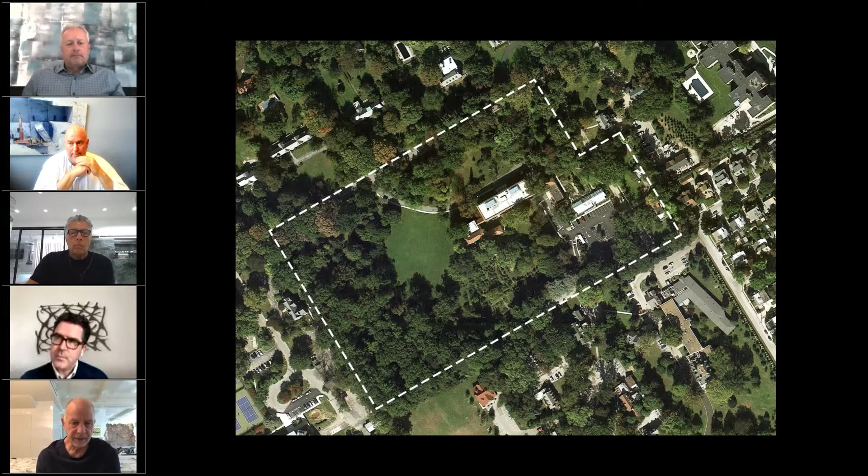He lived in Merion, Pennsylvania, in an arboretum with his wife, and he wanted every person to be able to see this art, particularly those who were not educated, not sophisticated. He welcomed people of all colors and all interests, but particularly those who were not pretentious, or quote, experts.

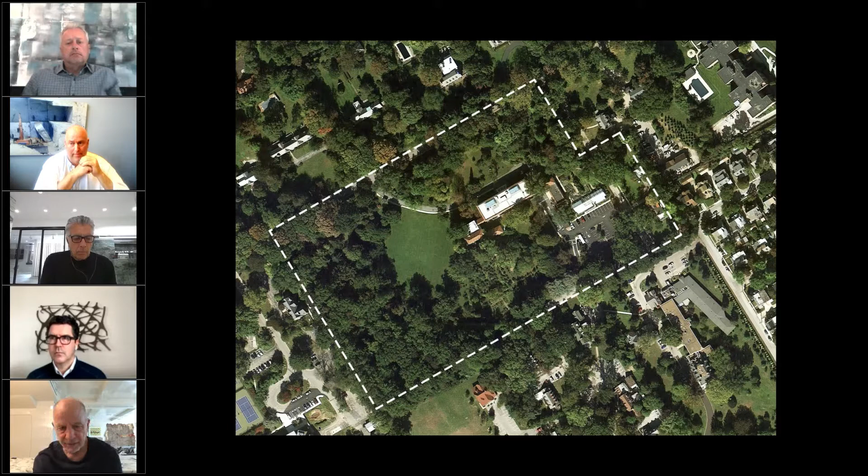Of course Dr. Barnes had a little pretension himself as the expert, but in time this wonderful location in Merion became a place where largely wealthy, white, often women and men would come, because it was embedded in a rather fancy suburb and was not an easy place to get to. Dr. Barnes, who died in 1951, was not there to help make sure all people came to his collection.

It suffered, and suffered sufficiently that they began to go broke. Dr. Barnes didn't allow his paintings to be photographed - he didn't want the paintings traveling. They had to remain there, and because it was in a very specific, small location, his will, which stated they not be moved, actually became a kind of trap for the Barnes Foundation.

Eventually, in dire financial straits with few people coming, and poor conservation practices, they appealed to the city of Philadelphia. In a difficult lawsuit - one that was won by the Barnes Foundation - they moved down to the Franklin Parkway, which we can see on the lower right, where most of the cultural institutions in Philadelphia are collected.

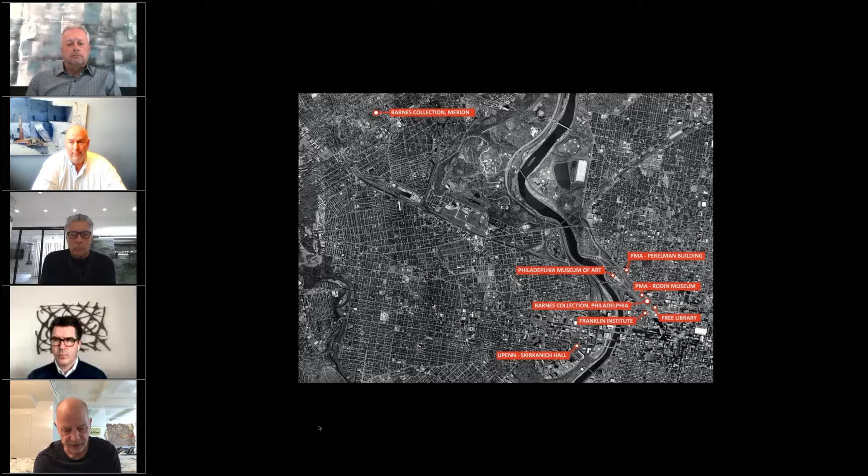The site he was given was the site of a children's house of detention, an interesting building architecturally, but it was so mute on the parkway that the only people living in the park at that area were the homeless. It was a very sad and actually a rather harsh existence for the kids who were there.

Eventually that was given over to the Barnes Foundation for one dollar, and a new facility was made more closely aligned to the land and landscape.

But nonetheless, there were plenty of protests. They believed that moving the Barnes to Philadelphia, breaking the will, was so far against the will and wishes of Dr. Barnes that they felt it was wrong. In a way it was, but in a way it wasn't, because Dr. Barnes was really very interested in having people of all color and all ethnic persuasions come to his museum, all abilities.

We came to the project, Billie and I and Phil, with an idea that the gallery was in a garden in Merion, Pennsylvania, which is where it was. Even though we were bringing it into the city, we wanted the garden to be in a gallery and the gallery to be in a garden, so we would have a both-and situation. We believe Dr. Barnes was both an elitist and a person who was really, really interested in populist culture.

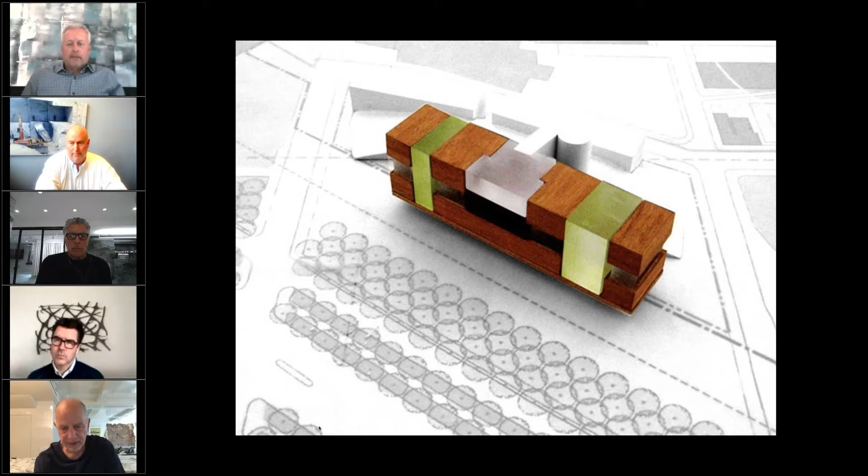This was an early model. By the time we had made this model, the image before was at the time of our interview, where we were simply describing ways by which we could think about the building.

The next image shows Paul Cret's plans. There were 22 rooms or 22 galleries, every one hung with a total of more than 2,000 paintings and artifacts, and they needed to remain intact. You can see that we analyzed the plans and found we could split the plan open and make the building accessible, which it was not, bringing light and air into the building and creating a better gallery experience.

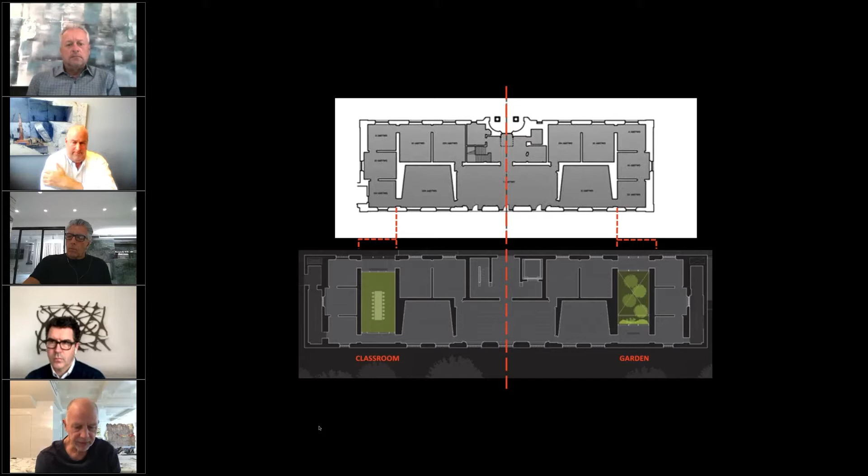We had a great client, and they were very comfortable with us showing them our sketches and struggles. Eventually we resolved, working with Laurie Olin, a plan that integrated not only the original galleries but all of the necessary functions for the new Barnes collection.

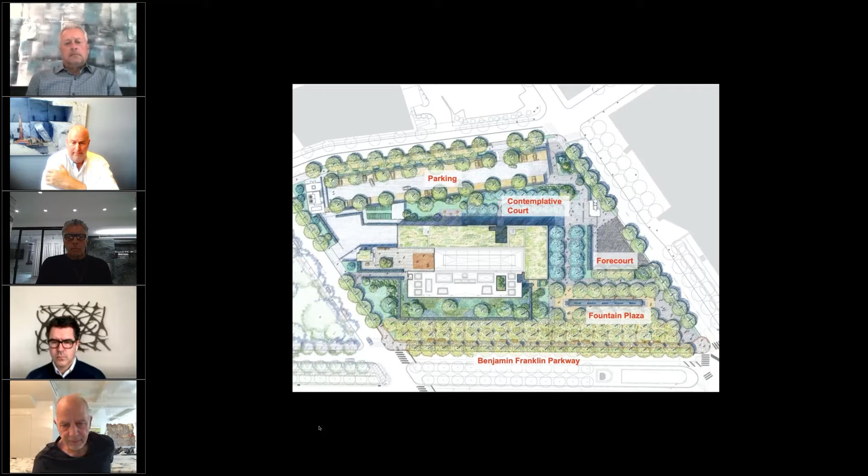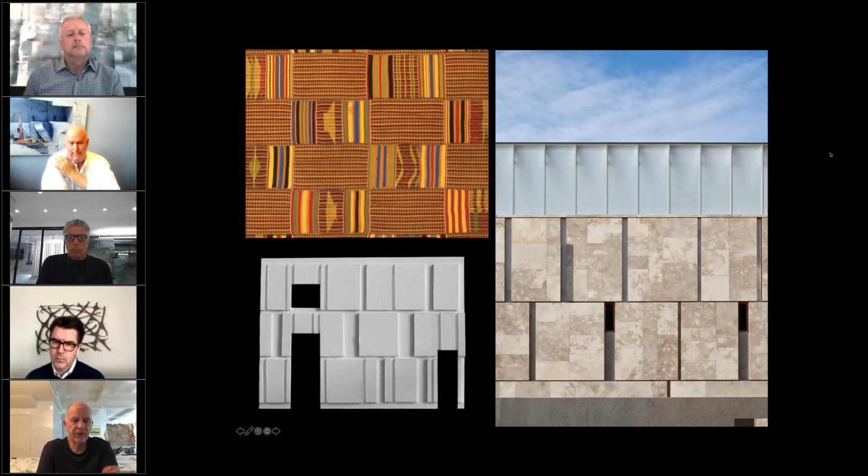I wanted to go back to the previous image and show first an image of kente cloth on the upper left, a model that we began to make so that we felt the building would be wrapped in a fabric, not a neoclassical wrapper, but in a fabric of cloth. So Phil, do you want to start talking and taking over the slides at this point? Yes, absolutely.

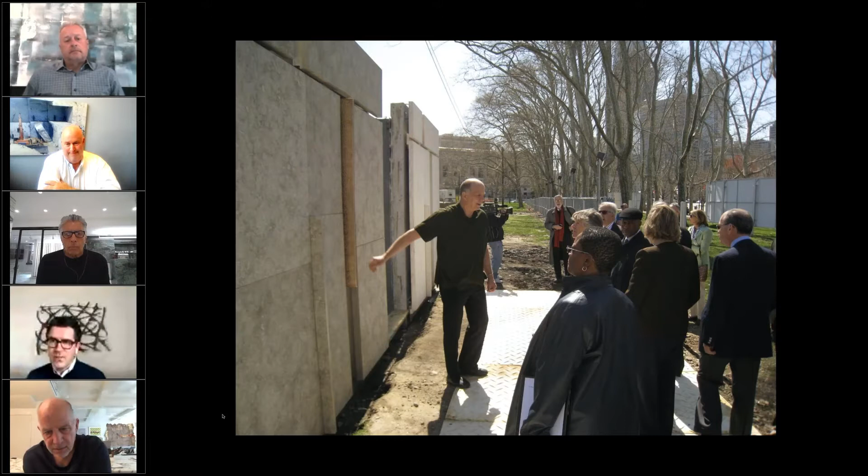So we can just advance to the next slide. I think the next one is actually Tod, not quite wrestling the trustees to the ground, but sort of working to convince them of the vision that Tod and Billie had for the project.

One of the key elements was expressing the thickness of the stone, giving the building this weight, this gravitas. There really was never any question about building out of anything other than stone. This was one of those key conversations where we brought the client physically to the site, letting them see it in the sun as the sun moves around the panels. We were probably on site for maybe an hour or two on this particular day, and we would revisit it for about another 3 or 4 months after that.

Yeah, absolutely. So the next sequence of shots really has to do with one of the things that Tod and Billie, having grown up as an architect in their office, and now working in my own studio, I feel the same way with the people that work for me - listening to the craftspeople is an incredibly important part of the process.

So first listening to ABC Stone, who was helping us find stone, then listening to Picco and ABC Stone, and DM Sabia and Driscoll. And actually, we believe in going all the way to the fabricator, so traveling to Israel and the West Bank.

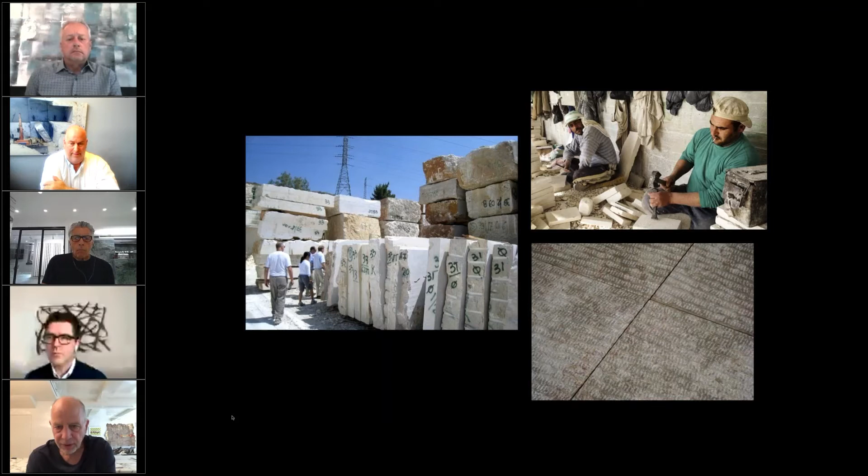This takes us to the next image - did we go to Bethlehem, where ABC is? We all worked with people there chiseling the stone in the stone shop, and asked them whether they could make some patterns for us. The one on the lower right is one I asked for, something that looked a little like cuneiform writing. The stone as it comes out of the ground is a little softer, and the surface is easily chipped by a chisel, slightly dented, and this then appeared to be a kind of writing.

So it had a different texture than you could ever achieve with a machine-made, machine-finished stone.

Here are just different textures. I think that's largely us in various positions, putting our hands on the different kinds of finishes that they could make.

John, Kenny, why don't you step in, because you were there all along and were critical to this. One thing that's interesting is this particular material - Phil, you said it well - there's a tradition and history of stone, not only stone carving but the use of stone in the Jerusalem area. In fact, there's a mandate from the government that anything built has to be built out of material from the region, and the gold is stone. The city actually has a glow at the end of each day. There's a reconstruction, like a processional route that goes to the old city. I think it was Moshe Safdie's building with the numbers on it - it just shows you the reverence they have for the use of stone.

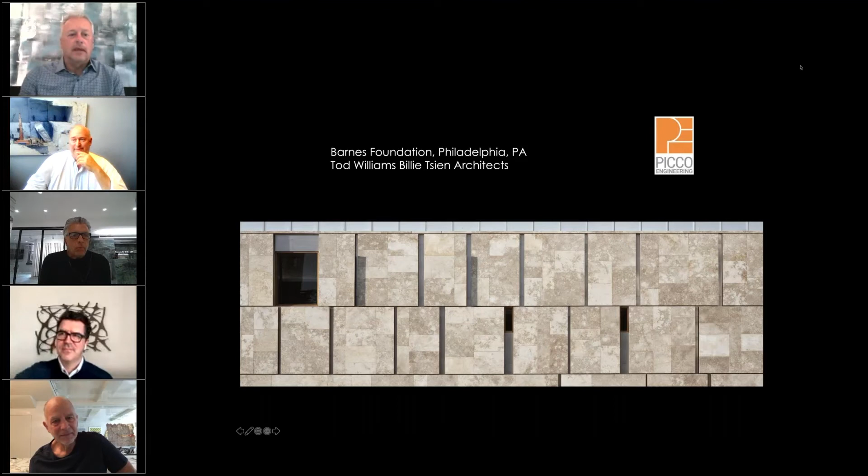So, Mike, are you going to take over? Please don't blame anything on me. You can blame it on Phil if you want. Mike, you're muted. Okay, I think I'm on now. So, yeah, Greg, are you giving me control of the mouse? Yes, you should have control now. Okay, I'll give it a go.

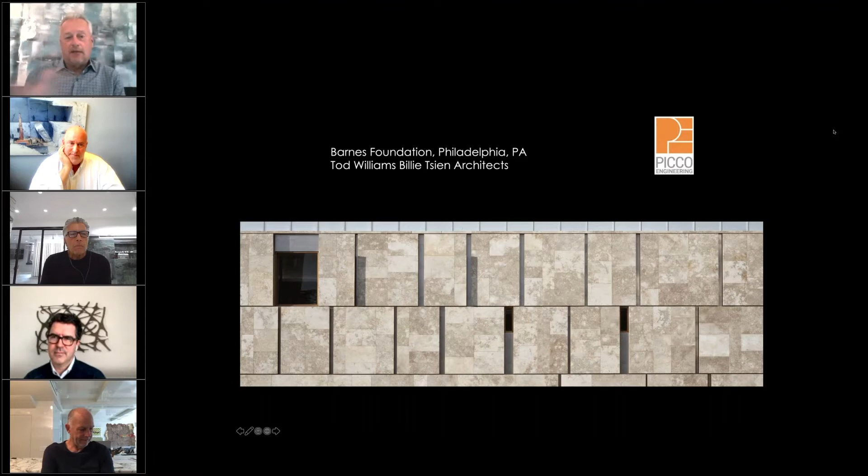So I think one of the themes that's coming out of all the conversation so far is really the teamwork and collaboration that's gone into a project like this. And, having worked on several projects with various stakeholders, the drive to a successful project really stems from that, and getting all the stakeholders involved right from the onset of the project, to understand the architect's vision, what they're trying to get accomplished. I mean, us from an engineering perspective, we highly respect the work that architects do.

Our job is to make it work. And our challenge is always trying to ensure we keep the architect's intent as much as possible. When you're dealing with natural stone, obviously there's physical characteristics that we have to always worry about, the environment that the stone's going into, which are all key factors on driving some of the decisions that may drive panel size, may drive thickness. And in this case here, the collaboration at the beginning and vetting through all of that—what's feasible, what's not feasible, what's flexible and fluid to accomplishing those goals—I think was really the main thing that drives a successful project. And this for sure is right up there as one of the top ones that we've been involved with.

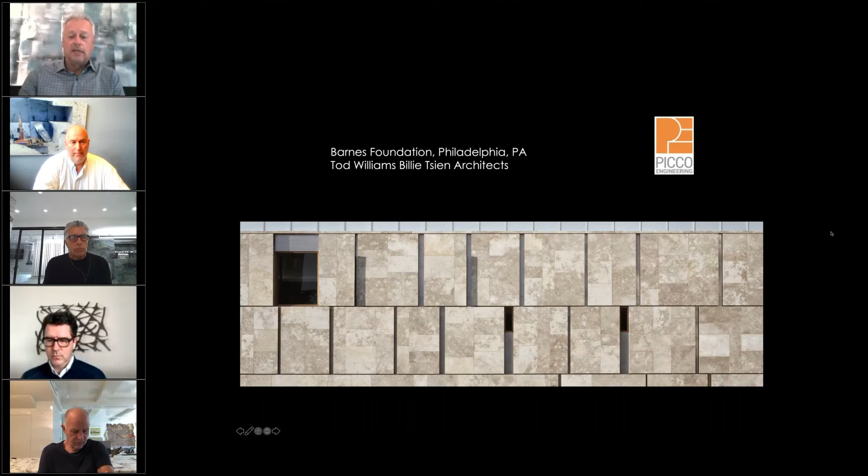So if I can see if I can advance. So in this case here, the elevations look quite simple and typical when you look at them, but when you get into it, there's not a lot of typical. I mean, they're all rectangular shapes, which is great to work with. You know, engineers, straight lines is always nice to work with.

But the way the panels were designed were isolated assemblies, and we approached it that way. We broke the project down into zones, and in order to track from a fabrication, logistics, installation standpoint, we worked closely, as Phil mentioned, with DM Sabia on their needs on the job site, their needs with logistics. So developing a numbering system that everybody could follow and track each panel where it belongs on the project was very critical, especially when you're shipping from overseas. You don't want to be shipping stones that are not needed till the end of the project. They have to be shipped in a certain sequence. So by creating zones and numbering everything in that sequence, you're able to control that into a bunch of small little projects, right from the stone supply to the steel fabrication to the anchoring requirements.

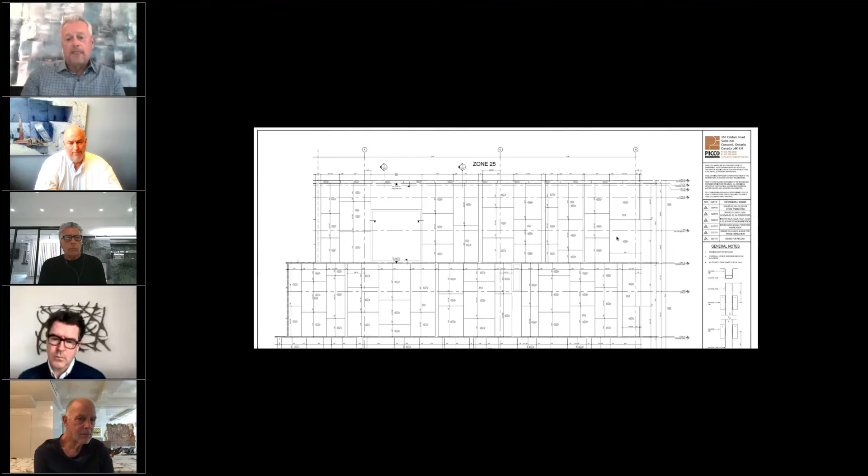So breaking it down like that is always a good thing. So here you can see a partial elevation with the stone numbering system. And then followed by that, we did a framing system—this is everything that's going in behind the stone to anchor the stone to. There's a lot of proprietary systems out there, you know, off-the-shelf aluminum grid systems that you can purchase, which we always like to explore as options.

In this case, the mass of the panels being in many cases 3-inch thick, because you wanted to see the mass of the panel, because you see reveals and the edges of the stone. Most of those systems were not robust enough to carry the stone.

So our next step was, how do we engineer something that's simple and practical? We developed a system with off-the-shelf HSS square tubes anchored back to the structure, and then built an anchoring system off that. That was the general approach we took.

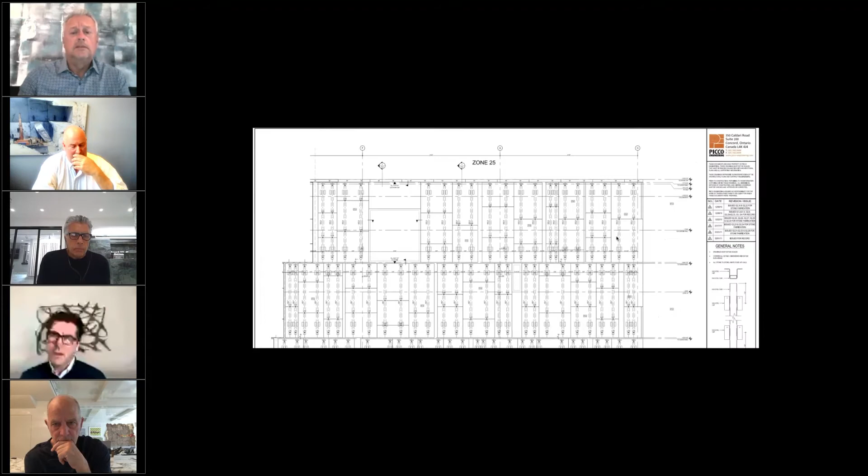Before you move off the elevation, I wanted to note, and this was something Picco was really helpful working out with us, that it required an in-depth conversation with the stone fabricator in the West Bank. Budgets and schedule are always important, and going to the quarry and the fabricator shop, we really began to learn the limitations of the stone from a cutting perspective and from a waste perspective. The original design of the elevation had this tapestry quality with the reveals Mike is describing, with individual pieces forming what we'd call super panels.

During the bidding process we were looking at a unitized system versus a conventionally set system, which is what Picco and Sabia came up with. There was also the notion of how big the panels could really be, both from a loading perspective and a waste perspective, to keep the price down.

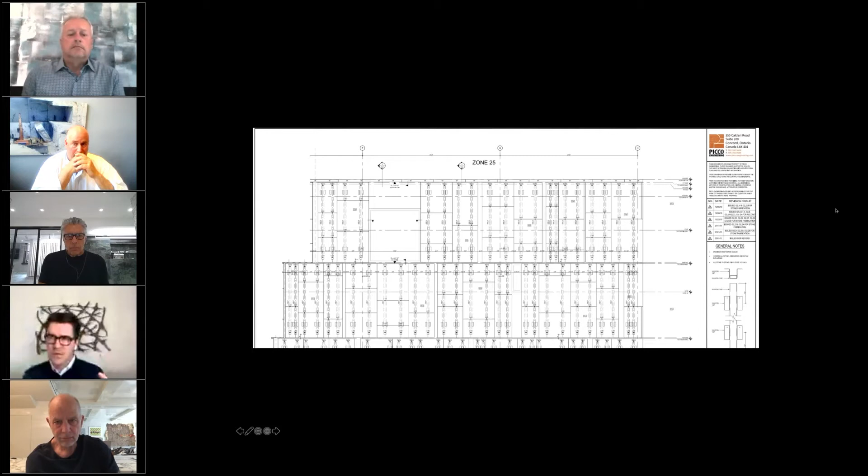So we actually redesigned and hand marked up numerous elevations to try to get the distribution and percentages based on waste, to use as much of the stone as possible. Maybe it's not the most sustainable thing to buy stone in Israel and ship it to Philadelphia, but we were trying to be good stewards of the material, because it was such a great, strong limestone with wonderful character. I just wanted to interject that relative to how the logic of the panelization came out.

Fantastic point. We've actually worked on other projects with architects where they've done exactly that, changed the pattern in order to utilize the stones and the size of the blocks being extracted, so you don't get as much waste. That's a really great way to utilize the stone as much as possible. That's where understanding the materials and being somewhat flexible in design while still achieving your goal is great, driven by the feedback and collaboration of everyone involved.

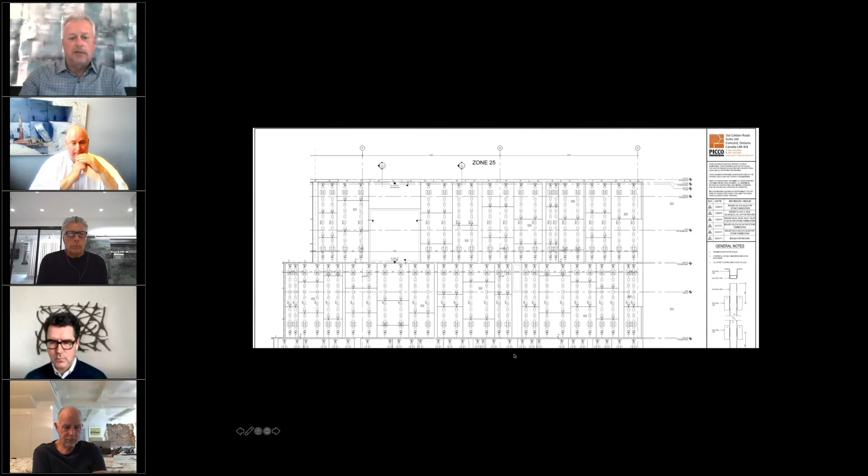So as we move on... let's see here, a little delay. I think I'm frozen. Craig, do you mind trying to advance the slide for me? Oh, now it went too far. Let's see. There we are, okay, I think it's just a delay.

Here you can see the framing we developed, just a square tube offset off the wall so the insulation could pass behind it, anchored back to the structure. We wanted to bring the steel outboard of the insulation, allow the insulation to pass through, and minimize penetrations through the insulation to control thermal bridges going through. In most cases, the tubes spanned the entire height of each segmental panel and had 2 penetrations.

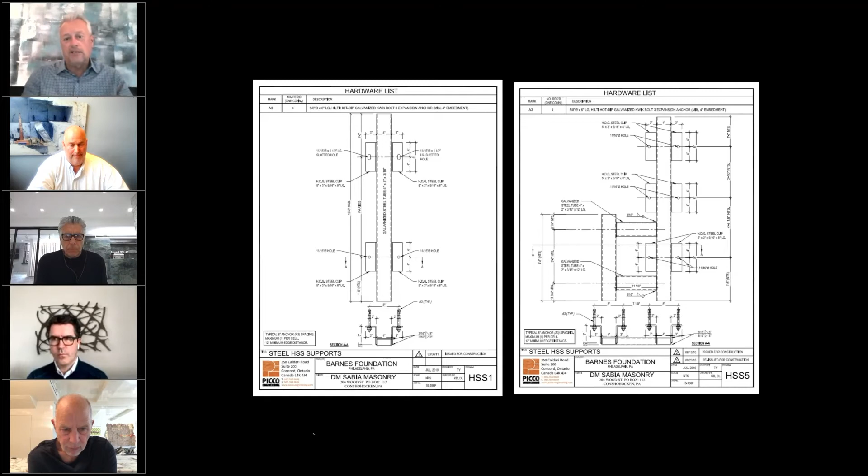In some odd cases, we had to custom fabricate tubes around openings, which may have had a third penetration into the backup. Again, although everything looks typical, there were quite a few custom shapes that had to be accommodated around the building.

Here you can see the typical approach of anchoring. In this case, because most edges were exposed, with the exception of the internal joints within the panels, we couldn't anchor on the perimeter of the panel or at the bottom or top, since we didn't want to expose the anchors.

So from an installation perspective, this becomes the most cumbersome approach because we refer to it as a blind connection. The connection anchor has to be set and the panels have to drop in place. You don't have much adjustment because the anchors are all blind, behind the panels. So there was a lot of input with DM Sabia, the installer, on how they wanted to approach that and what our options were to make it as efficient as possible.

And this was one we came up with a pocket kerf, which we pocketed out the back for the load bearing, typical at the interior joints of the panel. And then obviously we had a lot of special conditions to deal with.

We had some roller shutters, so in this case we had special connections to anchor little soffit pieces. There were also reveals in there that we had to ensure all our anchors were away from and allowed enough space.

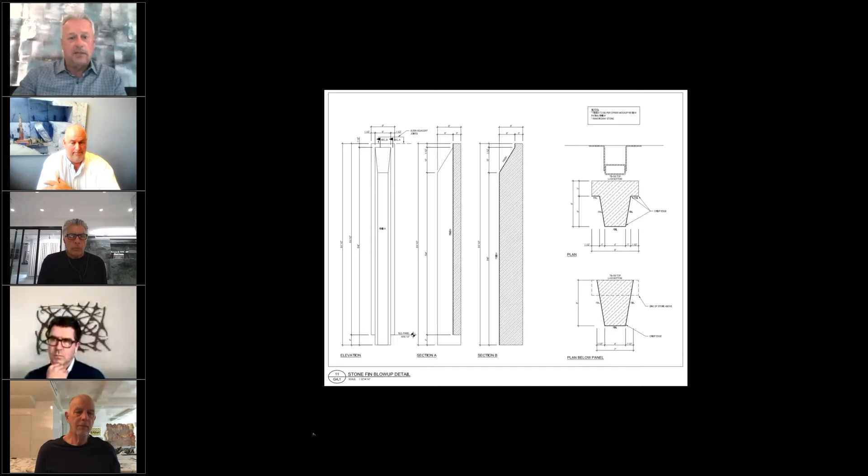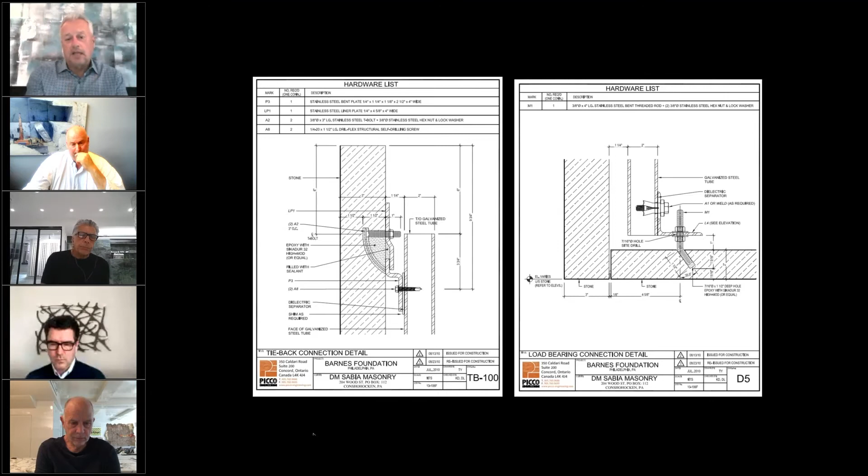In the other case on the right, it's a more robust anchor because it needs to carry much higher load, it needs to carry the dead load of the stone. So various anchors, again, from the outside looks very typical. When you get in behind, there's different complexities and different conditions.

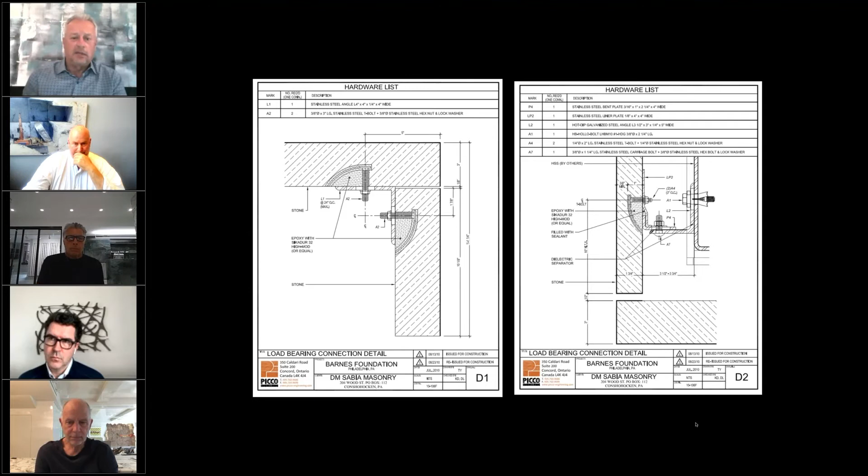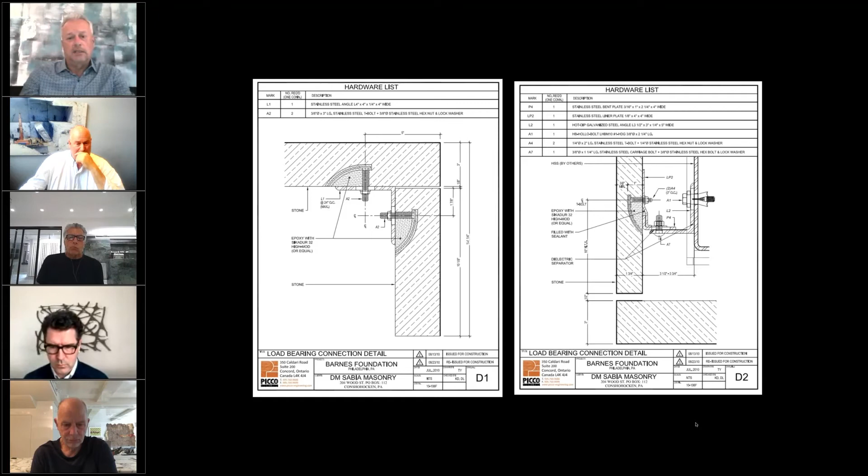Again, a blind connection at the back, but rather than slotting into the stone, we fastened a back of it that locks into the load-bearing connection. So a lot of technical information here, but I just wanted to cover some of the various conditions that we have to deal with as structural engineers on how to fasten the stone. And obviously, the more complex the job, the various conditions we have to deal with, which really is the importance of getting involved earlier on the project to really work with the various people involved.

I mean, we did look at an approach of independent anchors, but that would require penetrating through at every joint, at every panel, 2 locations. And this way, we really limited that from a thermal bridging perspective. I think it was a very effective approach.

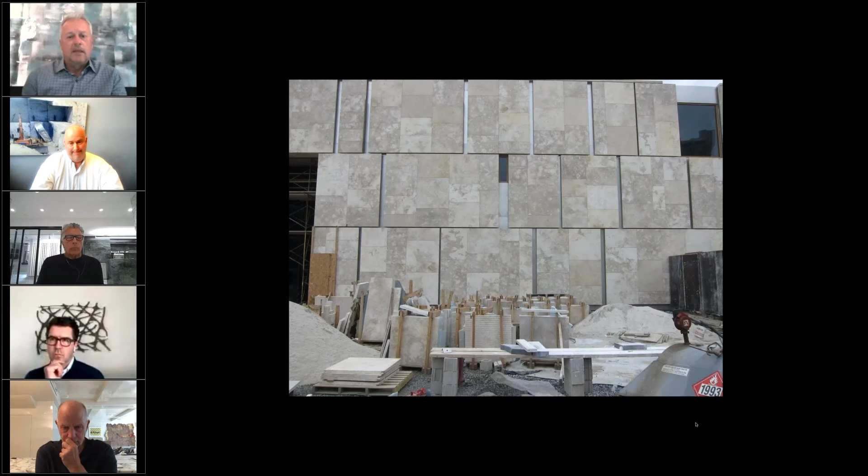And here you can see during the installation of the job, during construction, a lot of the panels on the ground there. They were all tracked and monitored so they could be shipped and located on the job site where they needed to be without moving them around too much.

That really is a collaboration with fabricators, installers, and logistics on the job site with the GC on what the sequence of construction is, because the sequence could go vertical up in sections, or it could run around the building in different layers. Understanding the sequence of installation really drives how we order the material and how we ship it to the job site. So understanding all that is extremely important to driving the logistics on the job site and the efficiency.

So I think that pretty much wraps up my part of the presentation. I just want to thank everybody involved here and those that aren't present as well on a really enjoyable project. I think the final photos speak for themselves. It's just a fantastic job to be involved with. So thank you to all of you for giving us the opportunity to be part of it.

Thank you, Mike. He started out by saying how critical collaboration is, and it absolutely is. Although I think Billy and I get too much credit for this project, that's part of the story, I suppose. But I actually do believe that the true story beneath the story is that we're always listening to one another and respecting one another. If you can do that and have an idea of where you're going, other people will help you get there. So these are all people who have become friends and collaborators, and hope we can do it again. It's a magical thing when it all works like this, but it's only collaboration.

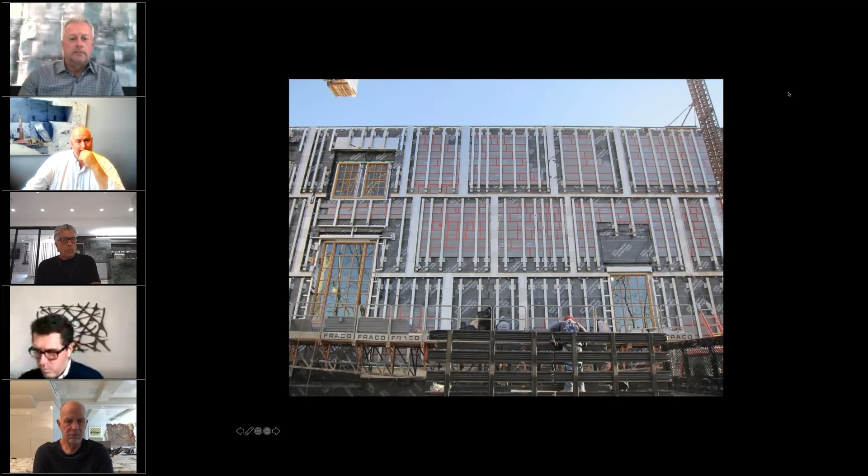We need to go in that deep to bear enough of the stone on the anchor because of the size of some of the panels. So we typically like to bear 2/3 of the stone on the anchor and 1/3 projecting out.

And that's what we did there. We did checks on the properties of the stone. That would be filled with a sealant, so there would be a little bit of a cushion between the metal and the stone, in order not to induce stresses. We always like to leave a little bit of space beyond the steel to allow for differential movement between the steel and the stone. So the intent is always to create a cushion between metal components and stone as much as possible. My idea is always to use the thickest stone possible, and that makes it heavy. And then, of course, not to channel it out.

So that milling out must be expensive, Mike. Milling out these pockets, is that complex and expensive to do? It used to be way more. Now, with a lot of the CNC equipment that fabricators have, it's become more economical. We used to do these at the ends of the stone primarily, so they could work from the end. But when it's inboard, it requires milling out, though it has become more economical and more accepted in the industry now with newer technology available. So it used to be a real big challenge when we requested something like this.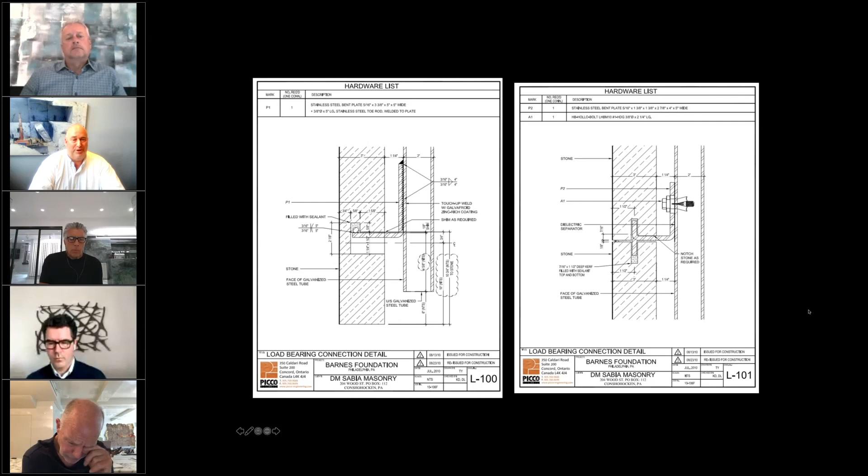Now not so much. Actually, that blind pocket has an interesting story behind it. Sammy at the factory looked at that and said, I don't know what that is. They don't traditionally do mechanical fastened facades in Israel. So he actually had to develop a two-process machine that would first carve the localized pocket, and then another tool that would do the upper part so that the clip would rest on that. It caused a little panic for a couple of days, but he figured it out. I don't think anyone was aware, but it was a bit of a challenge that we overcame.

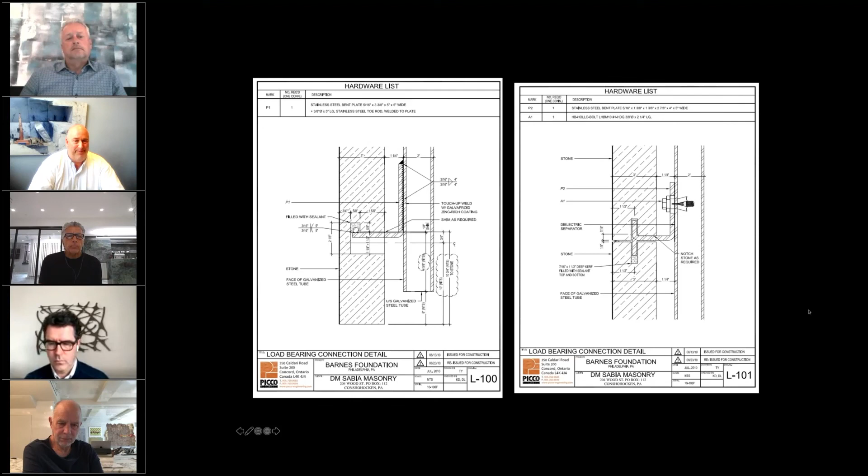Okay, another question for you, Ken, from Jonathan. What is the status of the Jerusalem quarry today?

The Jerusalem quarry is currently closed. We have 500 cubic meters of material in a yard in Jerusalem, and we've been burning that material on projects. We actually have probably a 6-year store of the material for the projects, based on current use per year. We controlled the quarry for 3 years, and more recently it has closed because of environmental issues. The thought is that they'll probably reopen it at some point. It's not that the stone is causing an environmental problem, but it's in an area that is well controlled by the government, and in the future that may change, because generally it operates and then it's closed, and then it operates and closes again. So we had it for the last 3 years, and we've got an ample store, but there is, like everything, a finite amount of material available.

Okay, I think that concludes the question. There was one question from Louise Corso asking if you were able to transfer any skills learned while at Richard Meier's studio, Todd, to this particular project, which I believe you may have already answered, but feel free to elaborate further. That'll be the last question.

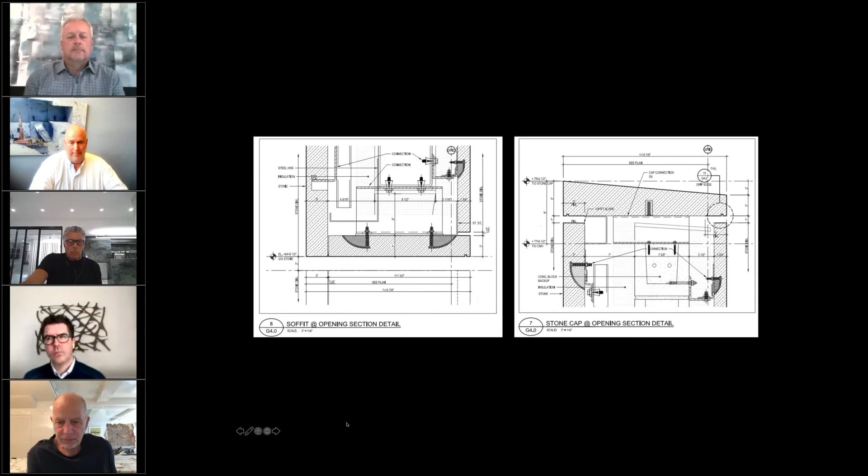Yeah, well, it was a great training ground for me, and I've often said I should have stayed longer because it was so green when I left. But I think Richard's sense of rigor was something I hadn't experienced before. I was just a kid from the Midwest and didn't know how to work hard. I learned how to work hard, and I knew how to be precise. But there wasn't as much exploration as I wanted there. And I won't talk about the work environment, because frankly I was a happy person, although spending way too much time in the studio. But everyone does that. Phil did it. We all did it. Anyway, thank you all.

I think this was simply great. When I was asked to do this, I immediately said yes. Said let's bring in Phil. I certainly couldn't do it myself. We certainly couldn't do any of this without the team of people we've just been talking to, and so many others. I hope and I'm sure we're able to find ways to answer questions, particularly technical questions, by directing them to Mike or Ken or John, even Phil, I'm sure would be happy to do that. I would say I know very little, but I'm happy to also answer questions.